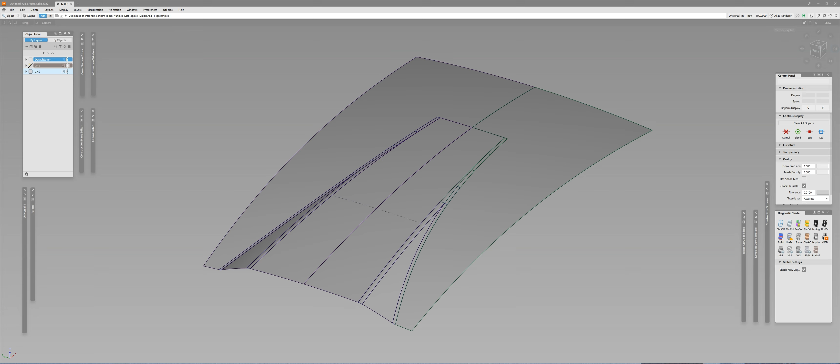Let me modify it to a centerline. And if you're interested to follow along, the link to the file is in the description also.

First of all, I will delete the original construction. As you can see, it was a mirrored solution, so I will leave this part intact just to compare the two methods, and I will delete this one. So I will delete all the surfaces we made, and I will untrim this one like this.

So you're going to see this curved surface. That was the original curve on surface for this fillet. Once again, if you're interested how to do this, which is very simple, refer to the original video in the description. So what I will do first is create a tail for the centerline.

And for that I need to know where the Y-fillet will go. To create a more or less natural transition, or natural direction better said, I will just take the original fillet direction using its curve on surface, extend it, and project it on this one.

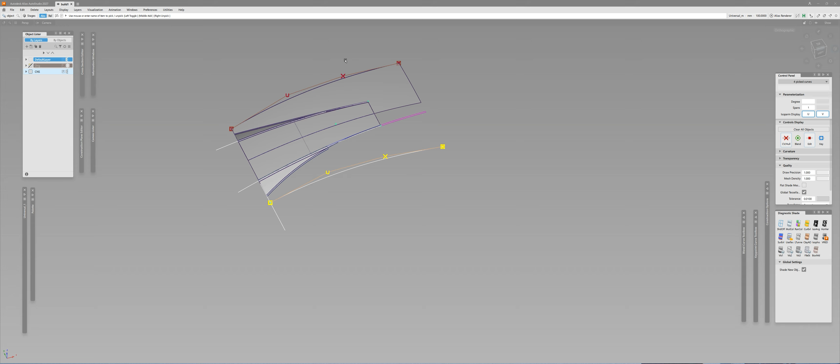Okay, let me actually delete all the unnecessary curves from the original construction. Let me delete this, and this, and this. What do we have else? This one, yeah, let's delete that also. And I will pick, what?

Okay, we have a little problem. It's not actually perfectly positional. Now with the overlap method, this is not an issue, but here it will be an issue. These two fillets, when they touch together, are not necessarily supposed to be collinear, or this edge supposed to be collinear, but I will talk about that at the end and show you the differences between my approach and some other approaches you might already have seen on YouTube. But what's important is that it's supposed to be perfectly positional, so let me snap it here.

Okay, now we are working with pretty tight tolerances. Our tolerance for position is 0.001 millimeters, so this is very tight.

Now I will take both of those. Important to note, the direction of these fillets was natural to their construction. Once again, refer to our original video, but that was originally constructed this way: they move much further, and then they chop them off. I chopped them off using their isoparametric domain space, and this is the natural direction for them, and I don't want to change them. This is really important later, I will explain closer to the end.

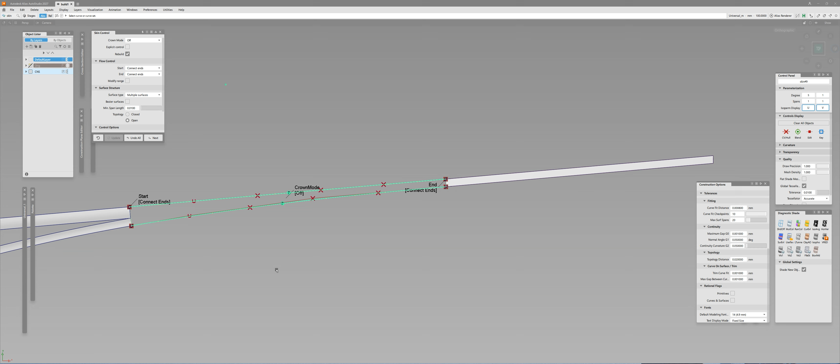So I will isolate, and even though it's not collinear or whatever, I don't bother about that. Instead, I will just create two standard blend curves, nothing fancy, just standard 5-degree blend curves. And here I will create a span, sorry, skin right through them.

Now you're going to see that the characters of both of the lines are different, and the control vertices are not perpendicular to each other. In general this is not an issue. In fact, if that will be a surface which is just supposed to be connected to one end or another, that's how it's supposed to be. You shouldn't change it, because this curve and its control vertices are spaced this way using a specific tangent and curvature scale to maintain proper acceleration.

However, because we will be projecting this on a surface, and the surface right now is not even positional to them, it's not a big issue to make our life a little bit easier and actually tweak the positions of the control vertices, so it will not actually harm us in any way.

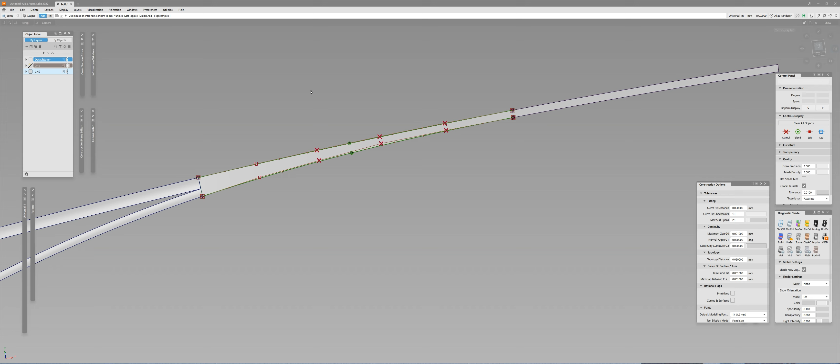Actually, it's beneficial, so I will align it a little bit. I don't want to be exact or spot on, just roughly like this.

Then I will delete these curves, don't need them anymore, and I will bring more degrees. So instead of 1, I will bring 5. It will be continuous. Now I need 5 because I will be projecting it on both sides of our original model, one on this one and one on this one, which is trimmed right now. So I will pick it, isolate, and align.

I will align it to the edge, edge align. I actually made a video about edge align and skew align. What's the difference? Very briefly, edge align means it's not only continuity constraints applied within the body of the surface, but on the edges as well. So we will take continuity from the trimmed edge, so that will properly follow.

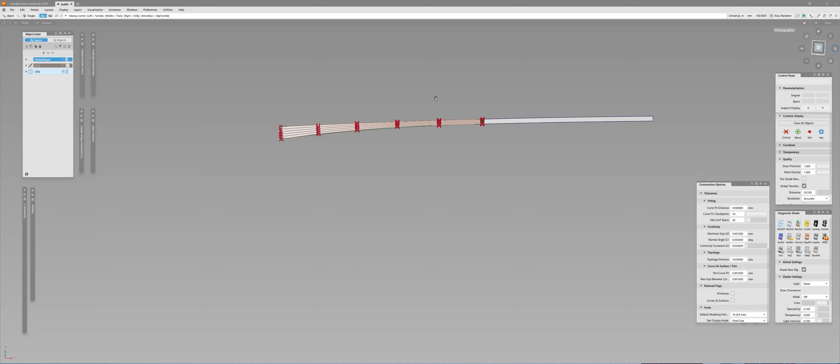Now I switch to G2 and edge, with the position influence set to 1. Position influence 1 means that we are actually collinear in position, and the curvature, of course, will follow to the original direction of the surface.

Okay, these are out of the way. I will delete the history and bring everything back. And let's pick these, and these, and isolate it again.

Now, as I said, we need to create a tail. Why we need to create a tail, I'll explain closer to the end. For now, just please stay with me here.

So what I'm going to do is create a surface which is a single surface, not two but one, which will be merged between the two different slabs or different parts of the model, and being continuous in the proper direction.

So how big is it supposed to be? No one can actually tell you, but in general, the rule of thumb is that it's supposed to be shorter than the actual transition. But the actual ratio depends - it depends on the curvature, it depends on your model, it depends on the tension.

You basically eyeball it. So right now, I will just take this surface and use the extend command with merge turned on. So extend, extrapolate, and merge - that's a hotkey for me, of course.

And I will just click and drag it away, maybe something like this. I believe that will do. So it's a little bit shorter than half the distance, and I believe this is more than enough.

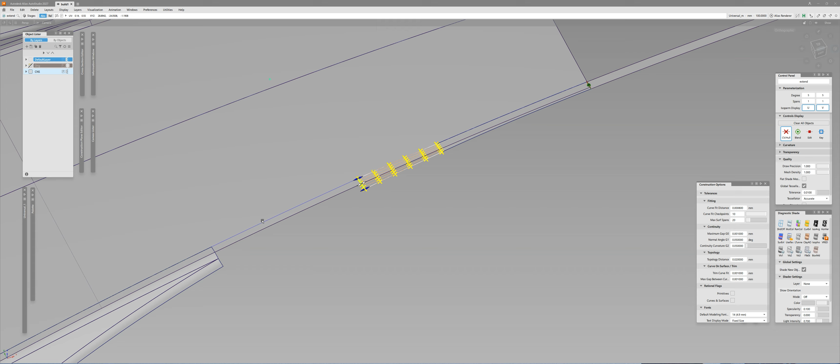Once again, I will explain why we need this separate part a little bit later. Now I will use another extend with different settings - extrapolate, but not merge this time.

And I will pull it back, and you can see now I have a second surface which has the same parameterization as the original one - same direction, its curvature, and so on and so forth. Okay, now we have two pieces.

Okay, now I will untrim this original part, which we used just to align to the proper direction. I'll trim it here, and I have two pieces. Actually, no, let me untrim it fully and see - do we have any curves and surfaces?

We have. Let me actually do it like this, and then trim it like this. Oops, trim. All right, good.

Okay, now what I need to do is take this tail surface and align it continuously to this part and this part. Let's do that - using the align command, project with position influence set to 0.

This is in one direction. You see the edge direction will be skewed. This is important for us because we don't want to realign the edge being the edge of the surface, the trimmed edge, or just the domain space of the surface.

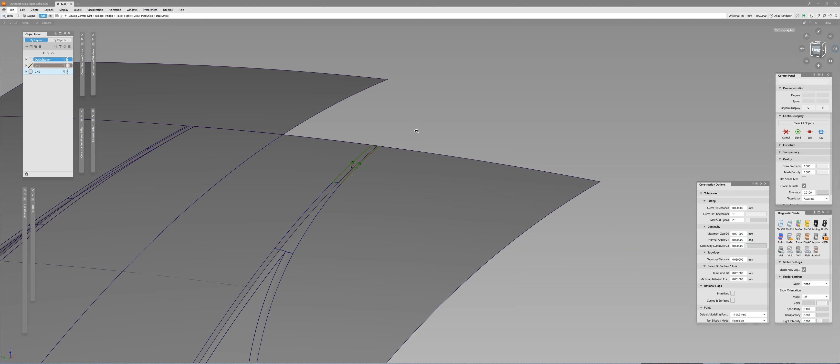We want to keep it as it was original, and Alias will try to do its best to maintain the same original direction and structure. We need this. So now we will do the same here, like this, and we will have ourselves a tail which is continuous to both surfaces here and here. And of course, let me select the surface, delete the history of alignment, untrim, and quickly check - it is continuous here as well.

All right, now I will delete this curve on surface. This curve on surface was an original one from the original fillet. Let me just delete this like this.

This is the new one, by the way, for the tail. And here we don't have a curve on surface here, right? Yeah, we don't. Okay, cool.

So now we will take these segments and isolate. Now the method called centerline, because in general you need to construct the centerline first. You create the centerline or the curve between the connection over two fillets and to the end somewhere there, align it, create it, and then create two separate surfaces which will merge and become continuous, which is quite tricky actually to do. But there is the same approach basically, so we still need a centerline, but we will do it a little bit differently.

So first of all, what I'm going to do is I will use a point, just to mark a space on the geometry, and I will use the offset command. I'm using the offset insert command with another type of span, not curve on surface, but a span. Click, drag, then hold Control and click on the point which I constructed, right? So now you're going to see here that it placed, well, here. Why here? Because this is the shortest distance between the two points, right? And that's more or less the proper position, at least at this side of our span.

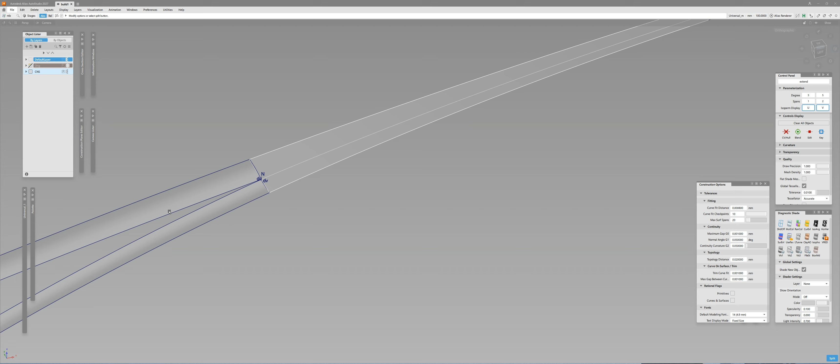Now, immediately after that, I will go in and I will use the command called NURBS to Bezier, which actually deconstructs the multi-span surface to single span surfaces, using the spans as a cutting and reconstructing tool.

So I'll hit spacebar. There's supposed to be original one. This is the original one. I will delete it. And this is the 2 new ones, right? They are continuous between each other, of course. And they are not necessarily continuous here. They're not even continuous. They're actually not positional.

Well, why? Well, because when we deconstruct it, the operation of deconstruction and rebuilding of the surfaces actually works within a specific tolerance, and it's not always identical. This is one reason. The second reason, and I believe this is quite obvious, is that this surface is now aligned and this one was straight. That's why you're going to see that we have some discontinuities here, and they're not positional because these ones curved and these ones are still not.

So the next part, let me actually delete the point here. Let me delete the point. The next part will be to align both of those, right? So I will use align command.

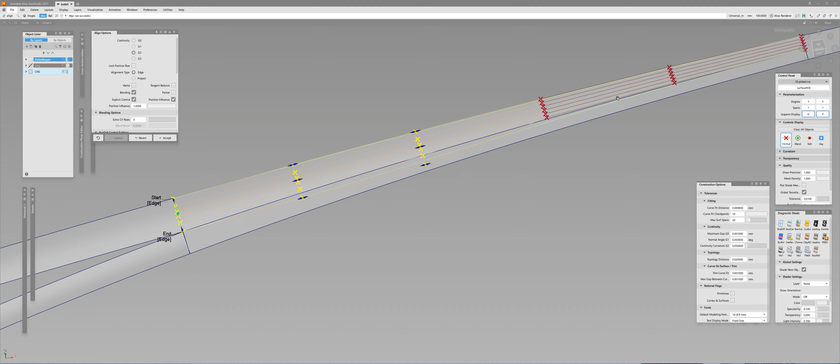I will use edge align, position influence set to 1, and click on the edge. Here is a very important part. This side is supposed to be edge aligned because we need to maintain continuity across the edge, following the edge of the original surface, but the inner one shouldn't be. You're going to see where it goes. It wants to go following this direction. We don't want that. We want to work with our centerline, which is now basically an edge between two surfaces.

So I will click on skew and it will try to maintain the original direction. All right, okay. It's not exact, but very, very close. Now let's do the same on the other side. So click, click. This one is skew, this one is edge. And once again, we have ourselves a curvature. Once again, curvature, edge, position influence set to 1.

Okay, now let's go to the other side, and I will basically do the same. I will go in and I will align this to this, and you're going to see that immediately when I'm aligning, it aligns to the whole surface. I don't want that, so I click partial. And what is partial? Same thing, it's closest distance. This one will be skew, this one will stay as edge, and I will do the same here and here. This one edge, this one is skew.

Okay, now I will delete the history, and I will look at the results. So this one is curvature, this one is curvature, these two curvature. This one, however, is not. Well, it's tangent, which is great, but it's not curvature.

Now, right from the get-go, about the centerline. So as you're going to see, if I use a duplicate curve, right, you're going to see this is actually our centerline, right? We didn't construct it manually, we constructed it through the span. However, even though here it's in the proper position, here it is not. Why?

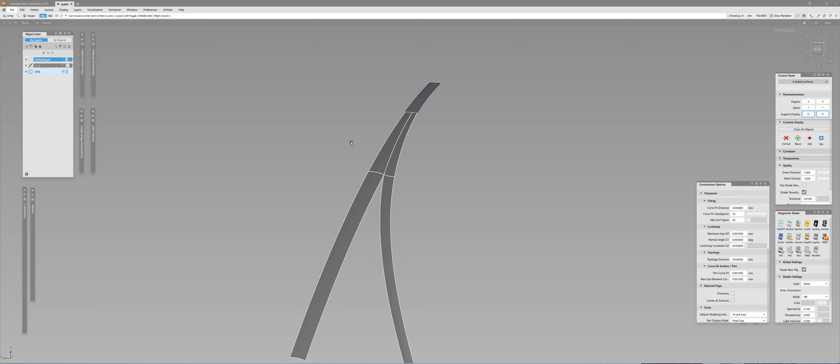Otherwise, the smaller fillet—because in our example these fillets have different sizes—if they were the same size it would be easier, but in this case they're not. If you keep it like this, we'll inherit this crampiness of the smaller fillet and it will look odd. So instead, something like 50-50, we need to merge them together in a balanced way. That's why it's called a Y-fillet.

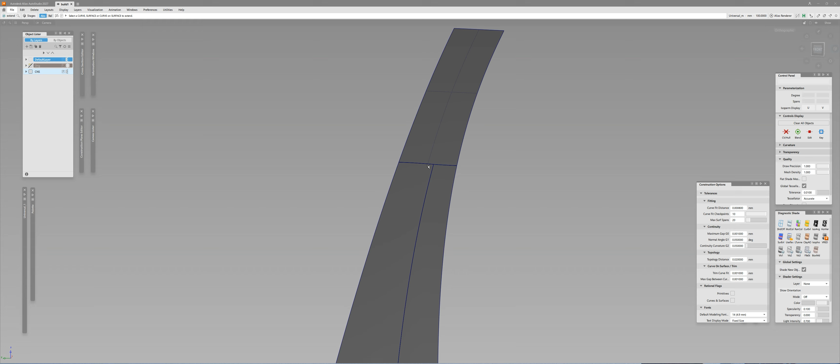So what I'm going to do is use the patch precision tool, click and drag. It gives me the isoparametric lines of the domain of the surface, so I know this is roughly the middle. Then I'll use the command called extend, with merge and extrapolate turned on. I'll click on this surface edge and just drag it.

I can be very spot on—I can place a plane, the point, and snap it here—but actually we can do it roughly, that's okay. So I'll push it down. Then I'll do the same here and push that down as well. Oh sorry, that's the wrong command. Like this.

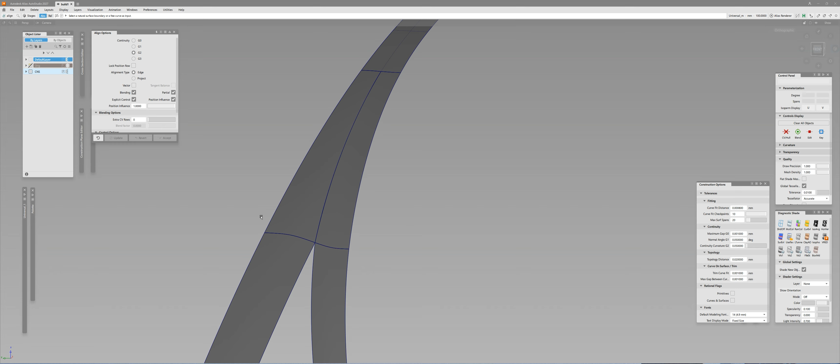So basically we realigned our center line a little bit. Now what we need to do is align everything else, so I'll realign that again. Why did we do realignment first if we're going to move this stuff? Because every single iteration gives us a closer and closer approximation to what we actually want. So this control vertex is already skewed in a very specific direction, and now I just need to specify a bit more what it's supposed to be.

So once again, skew edge on one side, here align—now you'll see it tries to align to the whole. Same thing, it's partial alignment, edge skew, right? And we're doing the same here, so this will be skew edge, and this one partial alignment, partial skew edge. Let me check once again—skew edge, yes, skew edge and skew edge.

Okay, let's check. You can see we have a slight deviation in the gap because when we slide it, we change the character a little bit. That's fine. What we're going to do is use the G0 with the position up, so just align it here like this.

What's next? We will delete the alignment history yet again. I'll bring everything back—what is this, the curves and surface? It's not a curve and surface. So what I'm going to do is project both of them onto their corresponding surfaces. This one will be projected here, and this one is supposed to be projected here. Let's do that—project, G2.

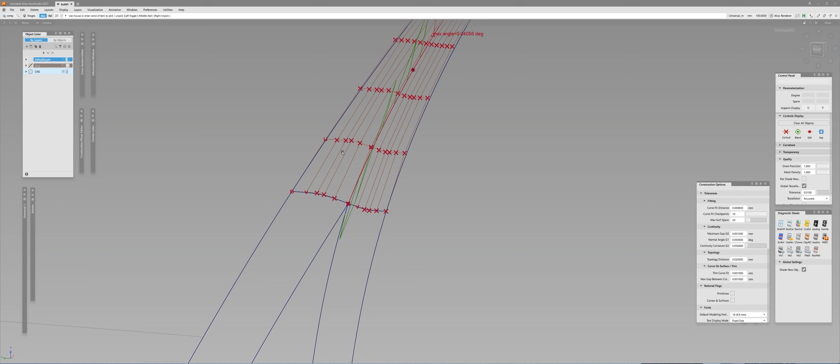This one tries to inherit the character of our fillet, and it was much narrower because it was constructed with a factor of 0.5, meaning it's pretty punchy. Now we have a pretty abrupt transition. This is not great, it will give us a hump on the highlights. So I can manually adjust it before moving on, or I can just delete it.

I already deleted the history. I can use the command called planarize hulls with the best fit adaptive, with a single. I prefer to do it one by one and see what it gives me. Remember, history of alignment is supposed to be deleted at this point. If it's kept, like here or there, the whole planarization can give horrible results, trying to balance with continuity, and it becomes a mess. So delete the history first.

So now I will just click and try to straighten it up using the adaptive method of straightening the hulls. Isn't perfect, once again it's always better to do by hand, but it's good enough. So when we did that, of course, we may lose the continuity, and we did.

Here not, here yes, here yes, here yes. And what we need to do, we need to do it again. And once again, we're not doing it for nothing. Every single time when we are aligning, we're shaping and shaping and form closer and closer to the result we're really looking for.

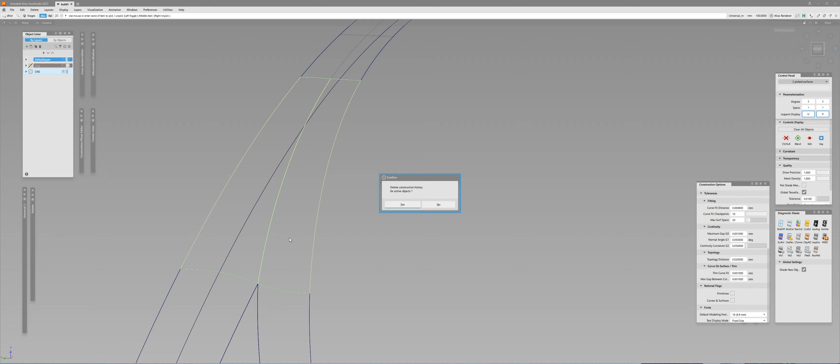So multiple realignments is a common tactic. Once again, position influence set to 1, align here. Let me check that it's supposed to be skew and skew - it is. Here, skew and skew. This one is not curvature, so let me delete.

Let's align here now using edge, position influence set to 1. Let's switch to these modes with position influence and edge. Okay, we are now released curvature here. That's fine.

Skew and edge, okay, once again. Yeah, edge, okay, here is good. All right, now let me delete them both again and do the final projections here - or final, maybe not final.

So this is the projection line, and you're going to see that we have deviation now. Because we realigned it here and it's supposed to be continuous, now here we don't have the proper continuity. However, the difference is very minuscule. So probably if I'll just jiggle this around, it can give me the proper result. It will not, that's okay. How about this one?

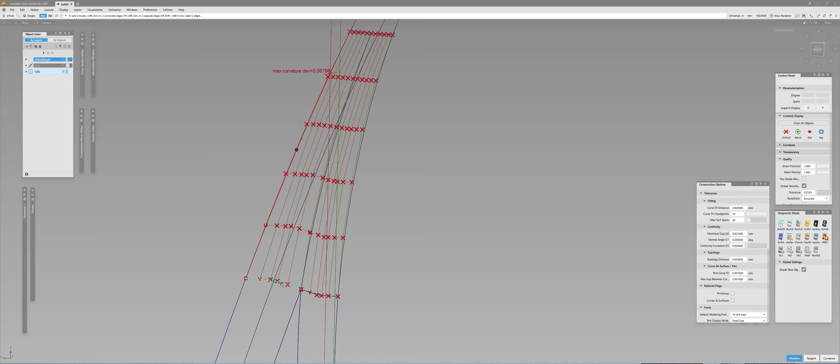This one works. So right from the get-go, what it tells me - and by the way, I'm doing it with you right now, capturing it in one big session. So if I'll make some mistakes or something is not right, I will be doing it in front of you, because I believe it's really important to see that even professionals sometimes do different iterations, multiple iterations, and this is normal, a part of the process.

So you're going to see that this one is not continuous, and this one is not tangent. Now, because this one is not tangent, what I try to do is check quickly, is it even possible to construct the proper shape I want, continuous everywhere with the proper character, having surfaces with 5 by 5 degrees. Maybe I need 2 surfaces, or maybe I need 5 by 6 degrees, or 5 by 7 degrees. I don't know.

So to check it out, I will now align as curvature with the position influence set to 1 and check. You're going to see, no sorry, that's supposed to be skew, and that's supposed to be skew, right? And when I check it, you're going to see that I wasn't able to achieve tangency. Let me just delete all the unnecessary garbage here. You're going to see that I wasn't able to achieve tangency with the proper directions.

What it tells me - the difference is really small, but it's there - basically, if I push it hard enough with a lot of CV adjustments, I will probably be able to make it work. However, in practice, it doesn't really make sense, because your time is limited. So instead of doing that, there is no crime to just add an additional degree. Now, don't go overboard - if you need more than 7 degrees, that's probably supposed to be 2 different surfaces, or you did something wrong. Here, what I'm going to do is I will revert.

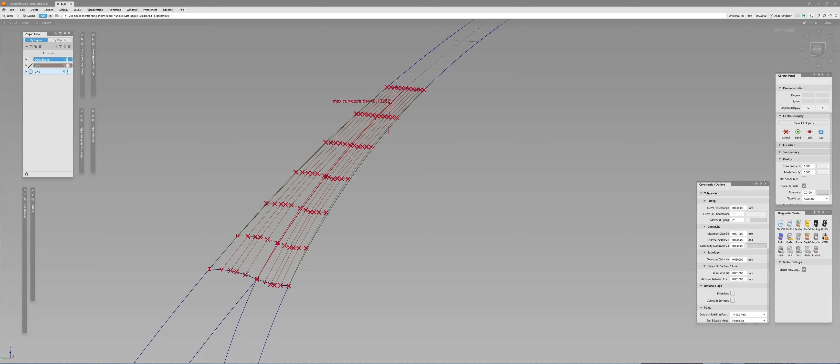If you remember, just a couple of minutes ago, I slid it to the left. But the fact that I slid it to the left, I made this edge proper for our transition. And this one, the original one, is in the proper position too. But no one tells you that all the other control vertices are on its proper places.

And in fact, if I look at the construction, you're going to see that some of the control vertices are actually in the wrong positions. Like, look at this one, or this one, right? They're actually going down. They shouldn't go that aggressively down. It's just too much. This is definitely an issue here.

And the issue is either with the actual center line, the actual cut, or with the supportive tangent and curvature rows. So we need to fix that. And we fix that by maintaining the alignment. As you can see, alignment type is edge with position influence set to 1. I will keep it like this because it means that these rows of CVs are collinear, tangent rows are collinear.

Curvature is following. And now by changing these points, or this one, which will be automatically picked from the left surface, I can actually tweak the right side. All right, it's pretty common tactics.

So what I'm gonna do is I'll probably take this control vertex and push it down. And by pushing it down, you're gonna see that this vertex is actually going up, right? And it's supposed to go up. I don't want to have a dimple here. It's supposed to be roughly, more or less, a naturally transitioned, right? So that's what I'm gonna do.

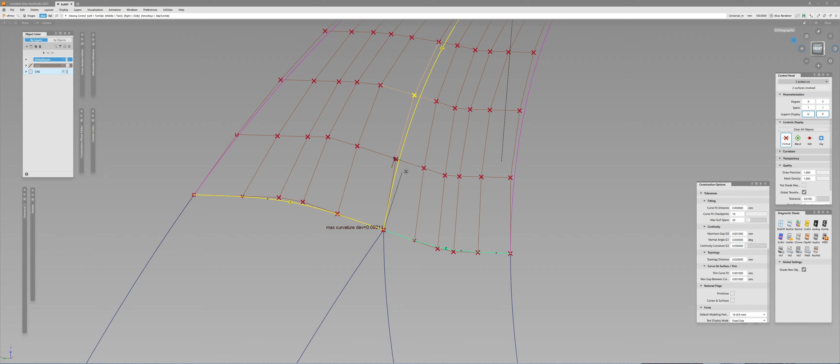And so some of them are still off. Maybe I need to just rise them a bit. No, it's just too much. But this control vertex, maybe these ones a little bit. No, it's fine. Like really want to be a little bit tighter to this side, right?

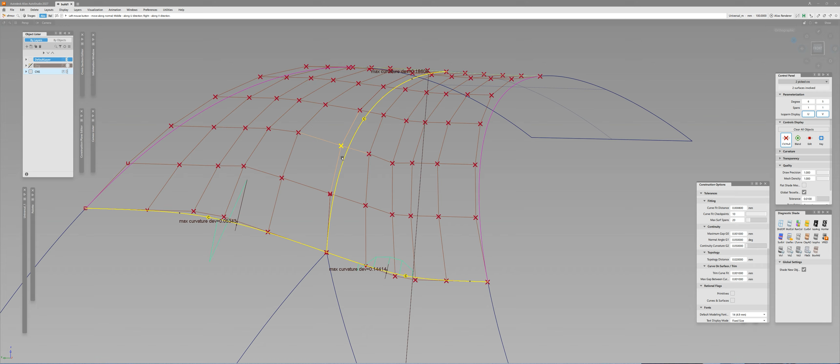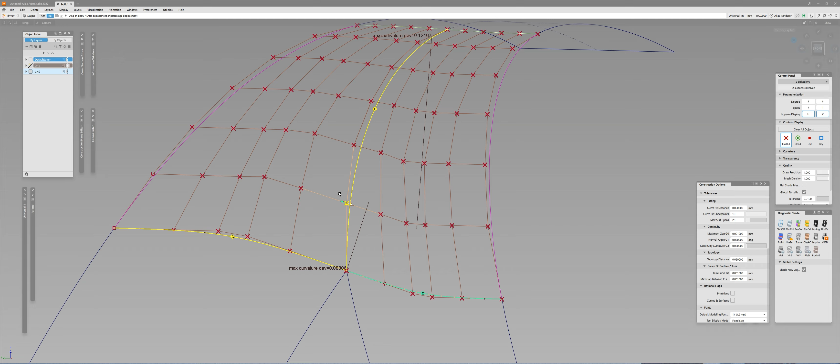I'm looking at this row right now. I believe these ones are okay. It really wants to go down, but I don't want to push it down. Let me try to align it here in this direction instead. Maybe a little bit more here. I believe they're still a little bit cramped. Yeah, I believe there's no other way, so let me just push that up, and then push this one down instead, and then balance with this one.

All right, that will do. Let's look at this at the back. So here we have a problem. No, here we don't have a problem. What about this one? Well, that means one of the control vertices is just going down, supposed to go up, right? So which one? I don't know, maybe this one? Yes.

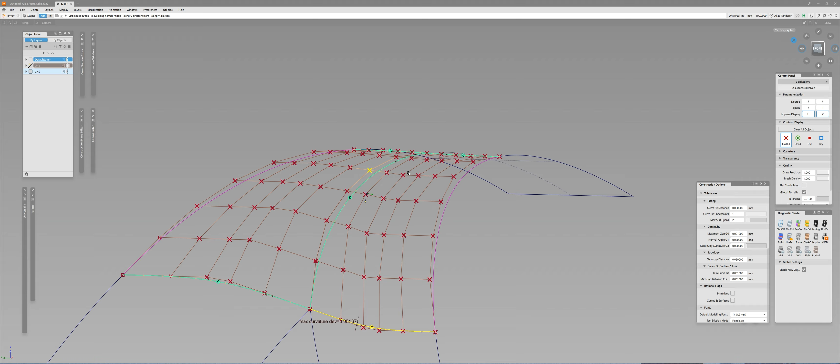Maybe one tangent row, one curvature row like this. A little bit down. All right.

Okay, so I will delete the history, bring everything back, quickly check that this one and this one is curvature. Let me now isolate and trim. Let me trim this one here, here, here, and here. Or actually, you know what? No, I will isolate this, untrim, and I'll just delete these curves and surfaces. I don't need that, like this, okay? All right.

All right, and we're actually done. So let me quickly check everything. I will show you the result, compare, and then I will tell you why I built it this way instead of any other way. So let's check the zebra stripes.

With the, what is my tolerance for tessellation? Let's bring it higher and look at the result. Here we go, this is our fillet. Now you see, if I change the tolerance to something small, we're gonna see that it's just all sharp. Well, it's just the quality of the tessellation of the mesh in the viewport, nothing else. So the higher it is, the more accurate the readings will be, right? And that is a pretty good result.

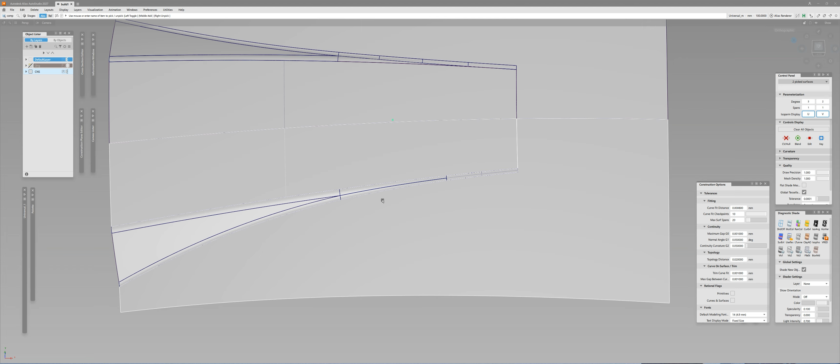Now let me quickly explain why I built it the way I built it. First of all, I've already briefly explained the tail. So the tail is extremely important for us, and this is the standard for centerline. Everyone will create a tail because the tail gives you the ability to create a perfect blend, the most natural blend between these two. And because this is a washed-out fillet, it's supposed to slowly and gradually wash itself out into the surface of choice. That's why this separate surface is so important, and it's not part of the original construction.

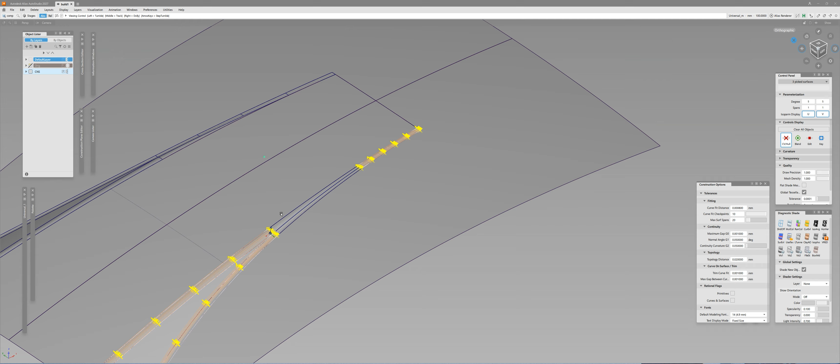Now, an important note: what I often see is people try to create the tail at the very end, and they try manually bringing spans and additional control vertices to basically match it as close as they can to the collection of your original fillets. Don't do it. There's no good reason to do that. It doesn't mean that you can't — you can — but it actually defeats the whole purpose of creating a tail, because the tail must be a natural transition between the two. It doesn't mean that if you do it this way, as some others do, trying to construct something much more complex in the beginning and then pull it away, it will necessarily make your final result worse, but you will spend much more time doing that for no particular reason.

Another important thing: after that, as I said in the beginning, I did nothing to my edges. My edges, as I said, were natural to the fillet. They depend on the type of the fillet and the edge construction in the middle — automatic, perpendicular, edge align, and so on and so forth. It just inherits that. And the fact that they are not collinear is not an issue. I see a lot of people try to overextend, find the middle ground, construct the line, trim, reconstruct.

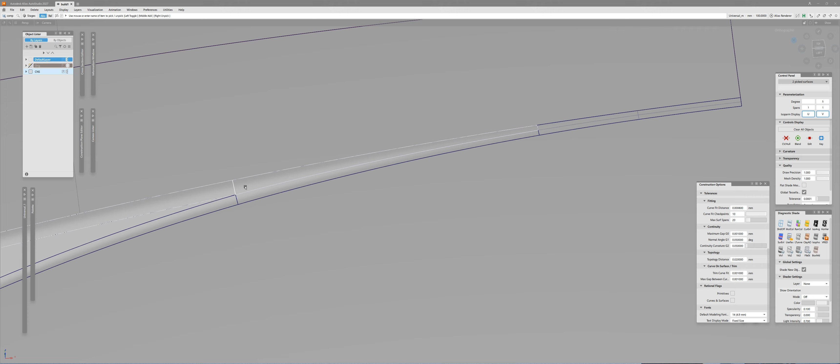They are losing the history and the tolerance for these fillets. They need to align everything only to maintain a straight line. Well, it's not beneficial, because at the end of the day, it's not about the straightness of the line. It's about the character which you transform, the direction, and basically the curvature from one surface to another surface with a skewed angle. That's what's important.

This angle is skewed, and because it's skewed, there is no particular reason to try to do all of this kind of mumbo jumbo to make it straight. You can, it will work. Once again, as with the tail, you don't need to do that. It doesn't serve any purpose, mathematically speaking, and logically as well.

So this is another thing, the third thing, as you're going to see: I never built a center line myself. I relied on a span, because as I showed you briefly, people construct a curve or a blend curve with position and curvature on one side and another side, or the manual alignment, whatever, and then they will try to fiddle with that so it will just kind of merge in terms of the CV placements and things like that.

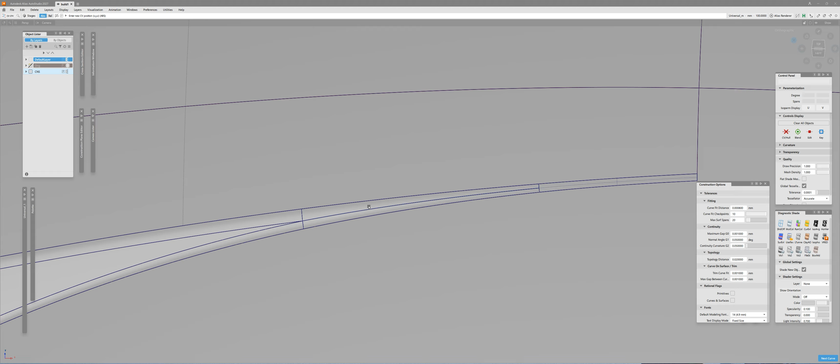It doesn't mean that you can't do it. Once again, you can, but it takes additional steps and additional efforts, something which you rarely have in practice, because in practice you never have enough time, and you need to be fast and efficient. So instead, relying on the control vertices themselves is actually a much more beneficial approach.

Now, is this a final construction in general if we are talking about the actual practical sense of this? Well, in terms of the quality, yes. It's good enough for what it is, and it will definitely work for consumer electronics. When it comes to cars, if this is a big model, right? Because this one is tiny, it's very small. But if we're talking about a car, it has big, prominent parts, and then of course you need to go in and do a little bit of additional steps to make sure that this stuff works right and there are no issues with this.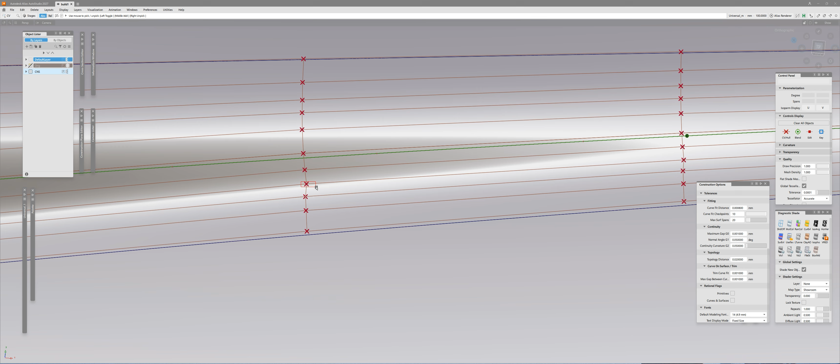First and foremost, you probably will go in and instead of relying on automatic hull alignment, you probably will do it manually, or after that you go in and do your manual adjustments, right? So you're going to try to make it a little bit more accurate. Like, for example, here you're going to see that this control vertex is not in the proper spot. So if I go in and try to just kind of align that...

You're going to go in and straighten your hulls. You will see that there is no additional stretching here and there and everywhere. You will try to make it all good and great. However, once again, in practice, you rarely have time for that. So if this is a big model, you will go for it. If this is a small model, you will leave it be. This is more than a good result, because everything has curvature and everything is smooth. You don't have any additional humps on the end, so everything looks like a charm.

So, final notes: which method is better? If you watch my original video, you know that I'm a big fan of the overlap approach instead of a centerline, for reasons I explained in the first video. But in the industry, different designers do different things, and creating the fillet using the centerline is absolutely a legit method to do. A lot of people do it. However, in practice, because it's very demanding in terms of the topology on very big and aggressive turns and bends, you will not be able to do it in a single surface. There will be spans, you'll be forced to bring spans separated in different chunks and so on and so forth. It will become a pain in the butt, let's put it this way.